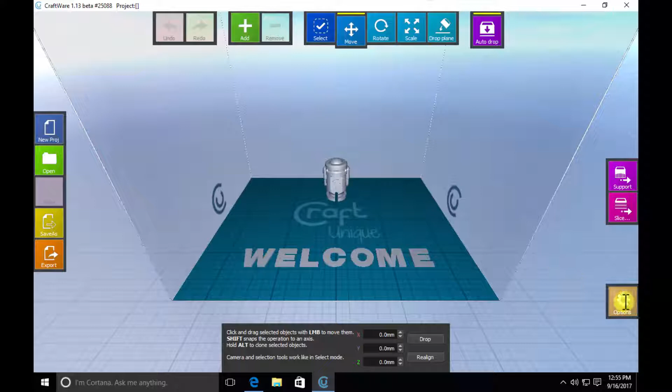I'm going to go down here to Options. I'm going to go to Printer. Again, I'm going to set my bed size right here to 300 by 300 by 400. And say OK.

Now again, that's a step I have to do because in the beta, you can see up here it's still beta. Version 1.14 is also beta, and for some reason when you install 1.14 it does not install the proper, I believe it's the registry items, to force this to save the bed size. So now I'm going to close it and I'm going to verify that that worked.

I'm going to minimize my browser, open up CraftWare, and maximize my window. I'm going to cancel the update again.

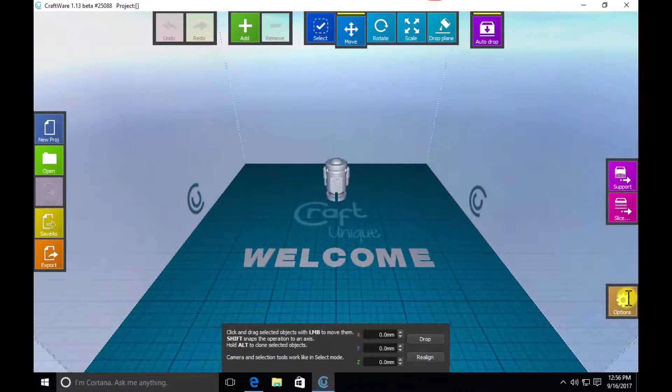I'm going to verify that my bed size held. So I clicked options, go over to printer, and it did hold 300, 300, 400. That's what I just set it to. I'm going to say okay and close this.

Now instead of going back to the website and downloading it, I'm just going to do it this way to show you it works. I'm going to go to CraftWare, it's going to say do you want to update, I'll say yes, and go ahead and start the download.

There, it's downloading automatically. You could click here if you wanted to speed that up, but I went ahead and just let it run. So now we're installing 1.14, and because we already installed 1.13, those registry items that were missing are now installed, so when I go into 1.14, those settings will be saved for us.

I'm going to go ahead and run the installer, same thing we just did a moment ago. Say yes, next, agree to the license, leave the defaults, and just like that we are done.

Okay, so CraftWare is installed. Go ahead and close that. I'm going to close the browser. We're now done with that.

Now the next thing, before you print anything, I'd say download the profiles, or you can do your own, but these are 4 profiles that I have built. I happen to like these, they come out really nice. So I've got an ABS profile, a PLA coarse profile, a fine profile, and a standard profile.

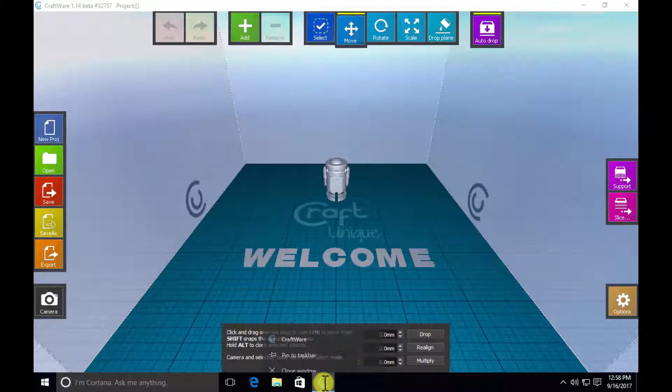Okay, so we'll open CraftWare again. Because I use my slicer really regularly, one more thing I'm going to do real quick: I'm going to right mouse click on the icon down here on the taskbar and say pin it to the taskbar. So now when I close CraftWare, it's sitting right down here for me - makes it real easy to get to.

Okay, so they put in this little demo here. I'll zoom in here, and as you can see, the drawing is really fast, it just does a great job of redrawing. If I had this on my main machine, you'd see this is a lot smoother and a lot faster, but unfortunately I have to use this setting in a virtual machine.

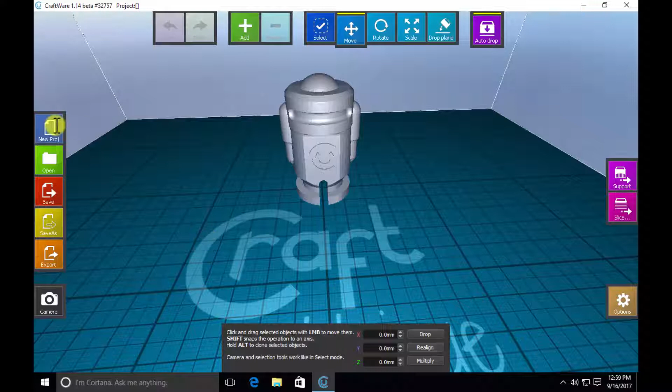So I'm going to say new project, I'm going to add an object. Oh, I didn't grab a benchy. You know what, I guess that's part of this demo then.

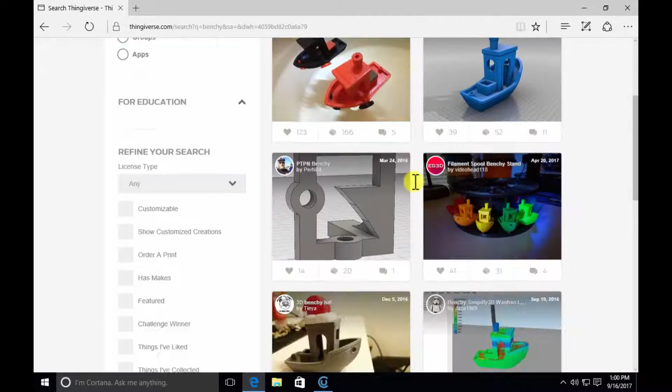So I'm going to go to Thingiverse. Let's go to benchy - I'm going to search for benchy up here. Let's find... where's the original? Oh gosh, where's the original? I don't even know which one's the original here.

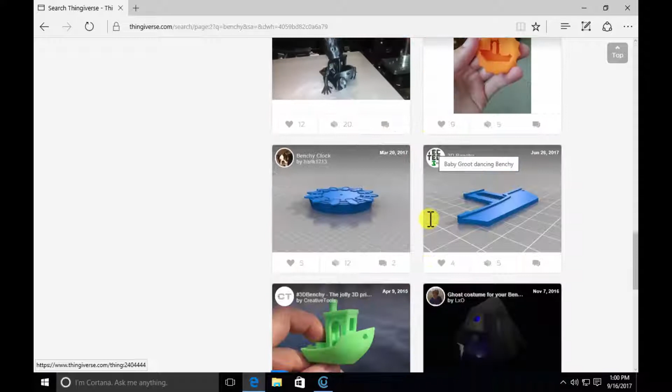There's a baby Groot benchy. This might be it right here - I believe this is it. So we're going to grab this one. I'm going to download all files.

Going to open the folder where that downloaded to, and again I'm going to move it to the desktop. Okay, close the browser.

I'm going to minimize CraftWare - I could close it, but I'm just going to minimize it. And why isn't it sitting here? Let's see... refresh, there we go. Okay, so here's the profile I downloaded and here's the Benchy.

So I'm going to unzip the Benchy. I'm going to right mouse click, extract all. I'm just going to say extract, it'll come out on the desktop here.

In underneath files is the Benchy that we want, the first one here. Actually, I'm going to pull this one here—I want to do the harder one just to demo how the software works. So we'll go back into CraftWare and add an object.

We'll go to the desktop, 3D Benchy files, and we want the larger one—oh, that is the large one. I'll bet the other one was a different type of file. So we'll go ahead and select that one, and it drops in. As you can see, it comes in on its side, which I'm glad it did because I get to show you something else that's pretty cool.

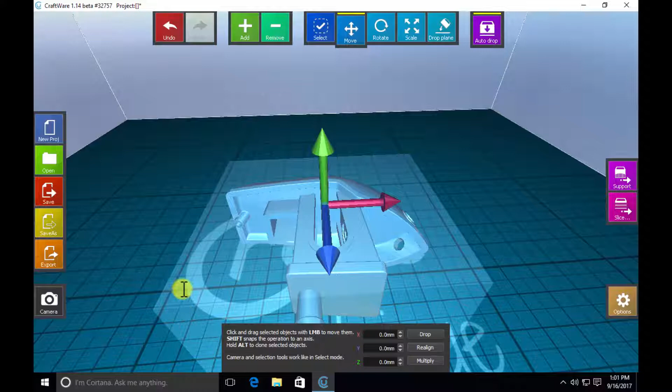The way you maneuver here is right mouse click or wheel mouse click to rotate—you just click and drag and it rotates. If you want to move the screen, hold down your shift key and drag with the right mouse button again, or the wheel. Okay, so I want to have the Benchy lay flat on the table here.

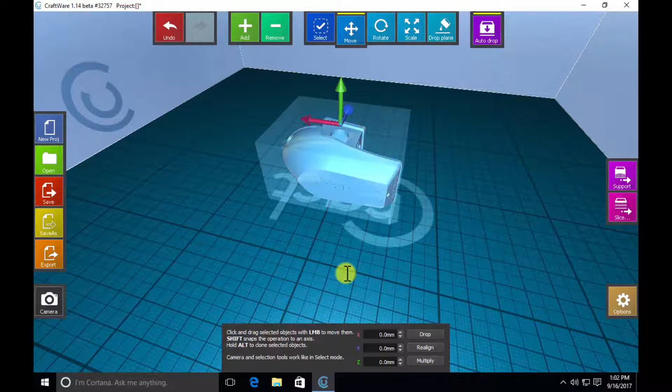So how do we do that? I click on this button called drop plane, then click on a flat spot. Let me zoom in and show you what's going on. If I click on the wrong spot, it lays that way—I want it to be flat. So I'll pick an area that's flat on the bottom, and like that, it's dropped down on a flat plane. Now I want to make sure it's centered on the table.

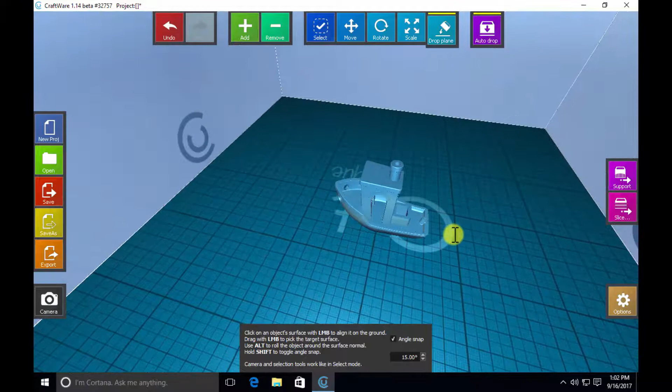One more thing I want to show you is these camera angles. I'm going to select camera, home—that gives us the default view. As you can see, the Benchy is a little further back than it should be; it should be centered a little better. But using camera view, you can do top, left, right, etc., and bottom, to look at the bottom of it if you want.

The other way you can go home really quickly—here, I'll go to the right, and let's say I want to go home real quickly. Hit the home key on your keyboard, and just like that, it pops to home.

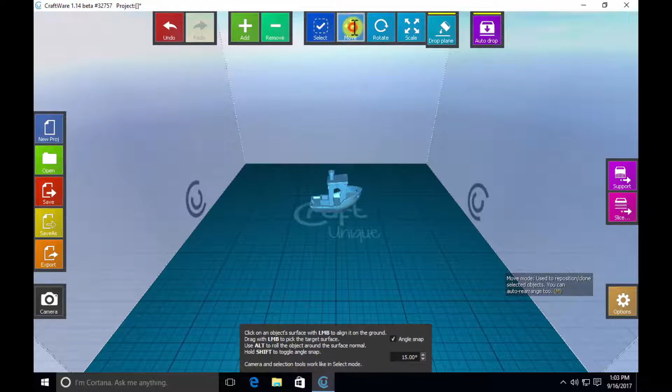Okay, now I want to move the Benchy to the center of the screen, or the center of the bed. I'm going to click move, and I can do realign, and it places it in the middle.

If I had more than one of these—whoops, I didn't mean to do that—let's say multiply. How many do I want? I want 4 total instances, so that's 3 on top of the one I have. It's a little different than some other softwares; you put in how many you want to end up with. So I'm going to say 4 of them. There's 4 of them. I can realign, and they all get placed in the middle of the bed again.

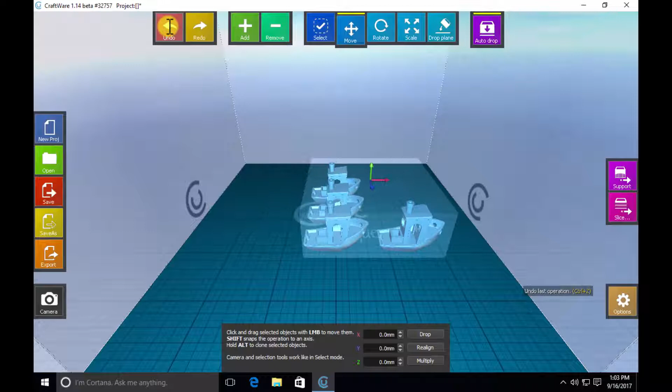So let's go back to the one—I can just undo. Undo again, and that's cool. You've got an undo/redo up here.

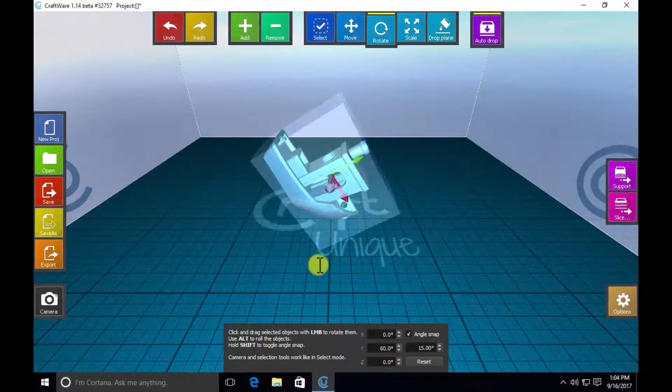I can rotate it if I want to—you select which one of these arrows you want to rotate on. Let me zoom in and show you that. If I select the blue arrow, it's going to rotate around a circle this way, and notice how it's keeping the item against the bed the whole time it's doing this. If I select the green one, it rotates flat on the bed. And the pink one goes this way—again, it's leaving part of the object on the bed at all times.

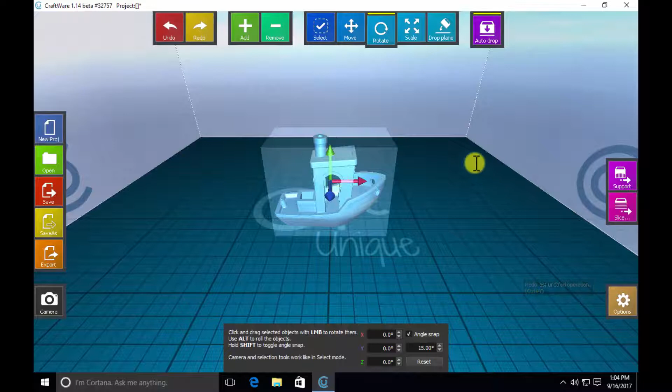So I'm going to undo those movements real quick—actually, I'll go back to that point there. Okay, I can also scale it. If I'd like to change the size, I can do so here. You can do locked so it's all uniform, or unlock it so you can do one direction only if you'd like. You can also do your mirroring here.

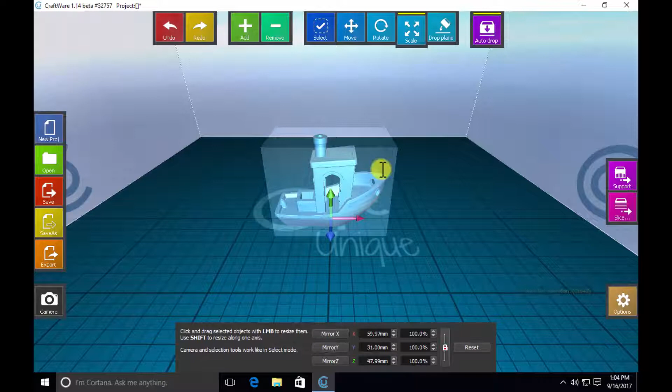Let's see, drop plane, auto drop—let's say I accidentally had it... whoops, I'm on scale, let me undo that. Go back to move. Let's say I accidentally had this thing up in the air somewhere, like that. I can do auto drop and it'll throw it onto the bed for me. Come on, throw it on the bed. Dare ya. Okay.

If you need help on what these do, hold your mouse over them, and down here on the right, you'll see a little pop-up.

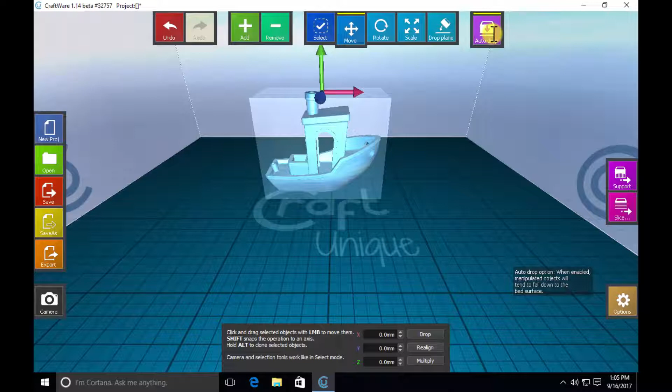Yeah, and I don't know why that's not dropping to the bed right now, unless it is—let me take a look here. Oh, it is on the bed. Okay, it did move to the bed. So let's recenter that again—we'll realign, and it's in the center. Let's check the scale, make sure it's still 100%, which it is.

And now is where we can go in and do some slicing or supports if we'd like. So let's go into supports real quick. Once in the support screen, I can go ahead and tell it to auto-generate supports, and you can see there, it just filled in all the supports for me.

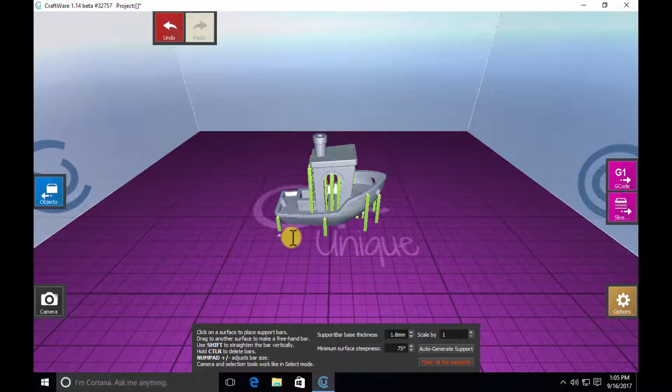I can go in and manually remove some of those. So if I know for sure I don't need some of those—which I know I don't need any of them, but in this case I'm going to say I don't need these on the outside edge—I hold the control key, and once I place my cursor over one of those pieces of support, it turns red, I click on it, and it disappears.

Let's say I want one in, but I don't want it where it placed it. I just move my mouse to where I think I want it, click, and I've got one in. Now I'm going to clear all the supports because I'm not going to be using these.

And we'll go back to the main screen here. Let's go to Objects. There's Place Back In. So now I can click on Slice, and this is where you can either use the defaults, which does a decent job. It's not actually too bad. You can have it automatically generate support, add a raft automatically. I'm going to go to Expert Mode, which is how I print everything.

And here's where I want to import one of the profiles. So I'm going to go ahead and select Import. I saved it on the desktop. There's my PLA fine. So it just changed all these settings to the settings I use on my system. I'm going to go ahead and store that profile so I can get back to it later. So I'm going to say Store. I'm going to call it PLA fine. And as you see here in the list, I now have PLA fine.

So in PLA fine, I've got all these settings set up. I've changed the speeds and what have you. I've slowed it down a tiny bit because right now my belts are loose on my printer, which I haven't changed yet, and I already started printing one of these out of here. So there's a chance my benchy is going to be screwed up, but that's okay. You'll get to see how good the print is aside from the little screw up that it does.

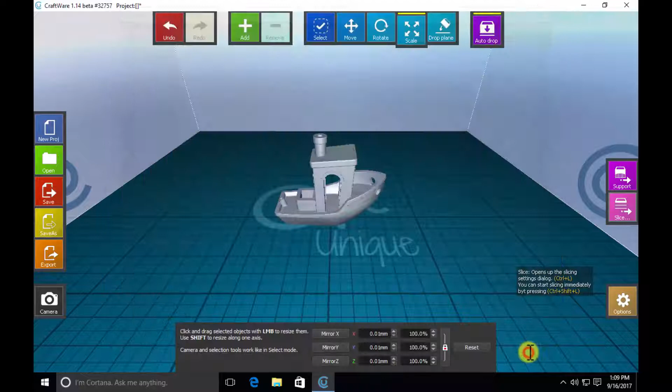Yeah, it's a little slow on this virtual machine, but you get an idea of what's going on here. So this is where things get kind of fun. I'm going to go ahead and turn off G-code on the left here. I'm going to turn off the travel, and I'm going to go ahead and leave this on.

Type, I have type turned on, and that's basically this here. The legend on the left tells you what type of lines are in what colors. You can turn it off and it becomes one color. Come on. Oh, there we go. We switched tool head. There we go. Go back to type. I like type.

I also like high quality, and that's all I show on mine when I usually print. So here's a couple of things. Here shows you statistics, shows you how long it's going to take, what time it would finish if you started right now, and the amount of filament it's going to use.

I don't remember what percent of travel means. In PLA, it's going to cost me 30 cents to print this. In ABS, it's going to be 25 cents. That's because of the prices I have set in the settings, which I could change, but I'm not going to bother with right now.

One kind of cool thing you can do, you can say animate. Oh, and unfortunately, animate's not going to work in the virtual machine. So, lucky for you, it's something you don't get to see here. Click on animate in yours and see what it does. It's basically going to show you the path that the tool head is going to take, and it animates it for you. It's kind of a cool look.

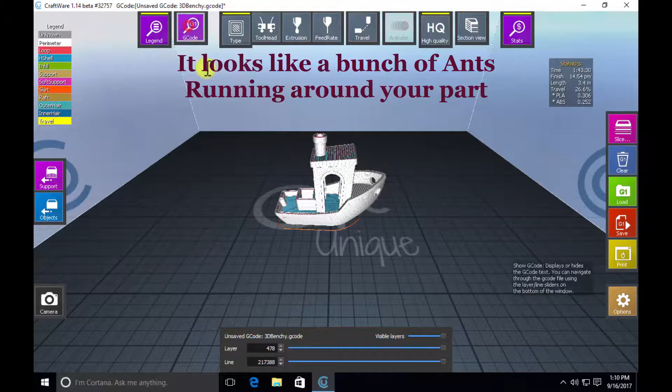The other thing you can do is turn on the G code. So over here is the G code. These are actually all the codes being sent to the printer, and when you slice through this item, you can see that G code over there changing and telling you what's happening on that particular layer it's showing.

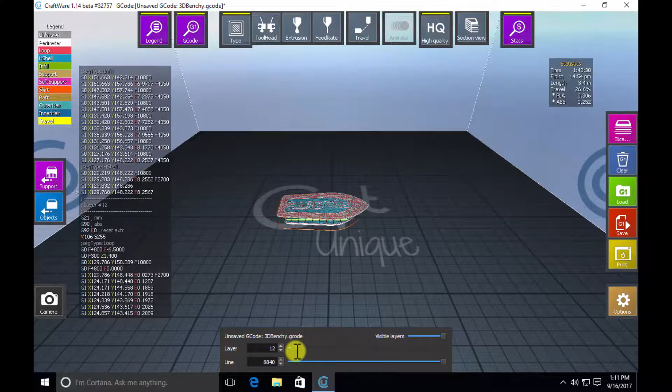Oh, and I'm just noticing, you know what, I did screw up. It looks like my... let me slide this up. Huh, little glitch going on there. Okay, that actually doesn't usually happen. That's funny—that must be with the redrawing I'm doing in this virtual machine.

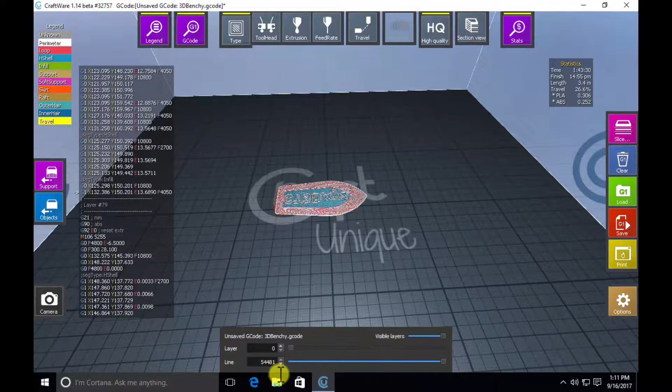But yeah, there's a little glitch going on there on the screen right now. Odd. So anyways, once you've sliced it and you like what you've got, click Save, throw it on your SD card, and move it over to your printer. At this point, we'll go ahead and move over to the printer and show you what that looks like. Some things are kind of fun to do before I leave, though.

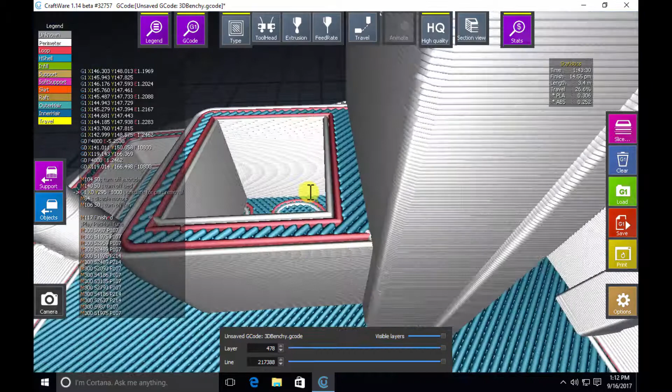Zoom in, and just keep zooming in, and look how detailed this is. I mean, it shows you exactly where each piece of plastic is going to be laid down. It shows you how it's going to lay it down, how long it is. It's very, very detailed. It's kind of cool.

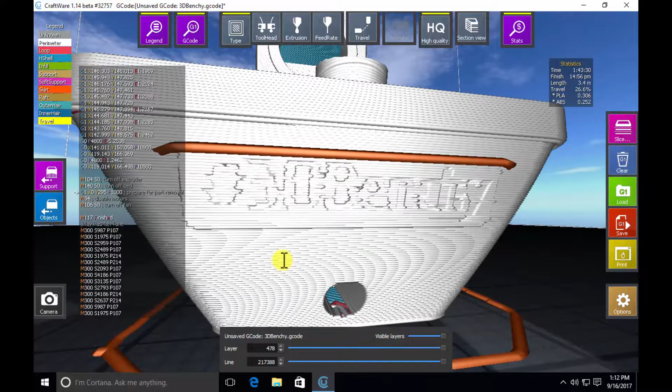Spin around it, right mouse button to spin around. It's going to try and print that, and actually on the object it comes out pretty decent, not too bad. I'm gonna hold down Shift so I can move that up, and you can see the bottom of it. Again, it's just kind of cool to browse around in here.

Okay, so that's it on the computer. We're gonna go ahead and move over to the printer, and we'll go from there.

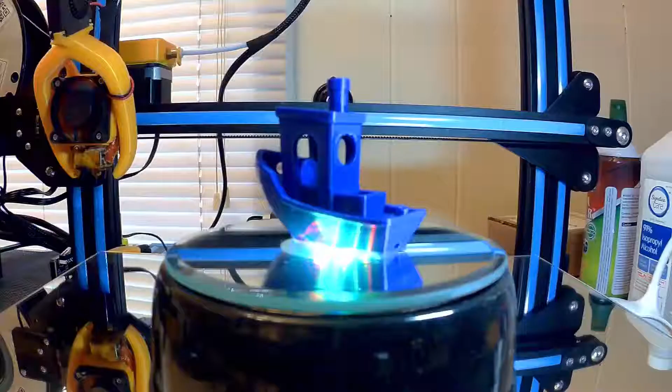Okay, so Benchy is finished, and unfortunately, like I thought was going to happen, I forgot to tighten this belt, and it did skip. This belt is a little loose right now—I noticed it yesterday, had the same thing happen, and was going to tighten it this morning but forgot. So I've got a skip in the print, and it's unfortunate because it's so clean otherwise. Actually, it skipped twice, it looks like—I've got one up here, and one down here.

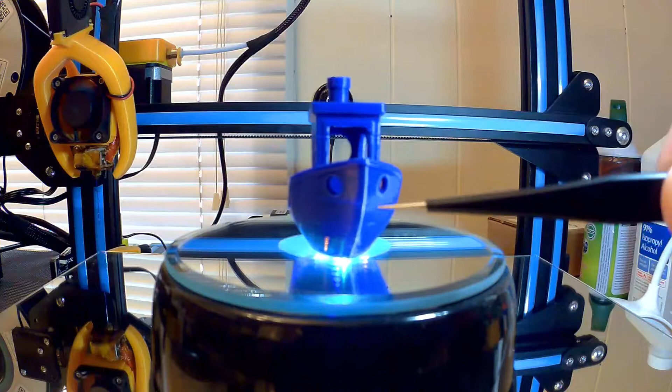But other than that, if you look at it, the printing is just incredibly good. Now, I did zero cleanup on this—this is literally off the bed, and here it is. I do see a couple little fine hairs inside there where the skip happened, looks like. But other than that, the arches came out real nice, the circle came out real nice.

The chimney is perfect—I mean, absolutely perfect. The box here is perfect. Everything is really, really clean. You can even see the printing on the back here fairly well—actually, I can read it, if I look real close. And here's the bottom.

See if the light will hit it right so it'll show up on camera. Not sure if it will. But you can read that too.

So unfortunately, with the loose belts, I did get a little bit of ghosting here—very fine, but it is there. And of course, the skips that I was talking about. So that's the sample we got out of it.

Again, I just want to say I really think that CraftWare is something people ought to look at a little bit more, and I feel like if there's a little more interest in it, they might further develop it, although they don't have much to go right now. I mean, they're right up there.

You can see the roof here is nice and clean. Like I say, the chimney's perfect. The box back here is perfect. This little hole is perfect. The hole in the back here is perfect. It came out just superbly.